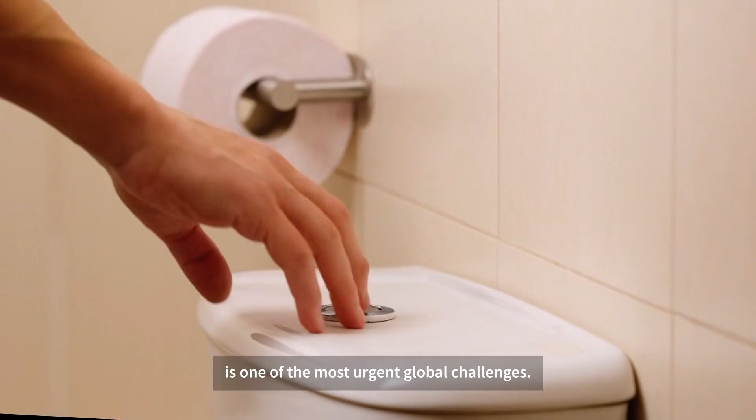Ensuring access to safe and sustainable sanitation is one of the most urgent global challenges. Despite notable progress, billions of people still lack adequate sanitation services. To tackle this issue, Sustainable Development Goal 6 was established. It aims to ensure the availability and sustainable management of water and sanitation for all by 2030.

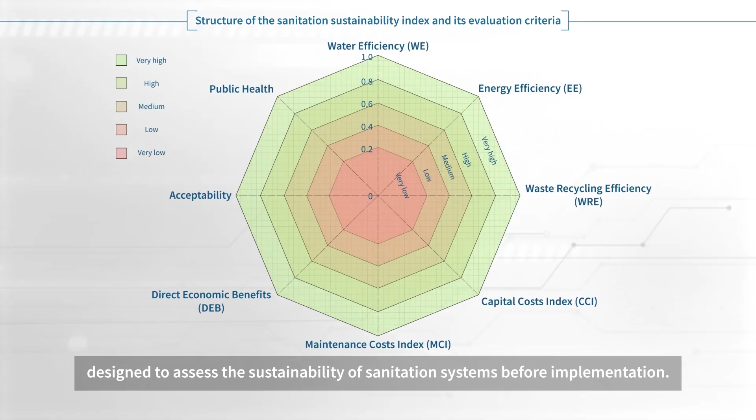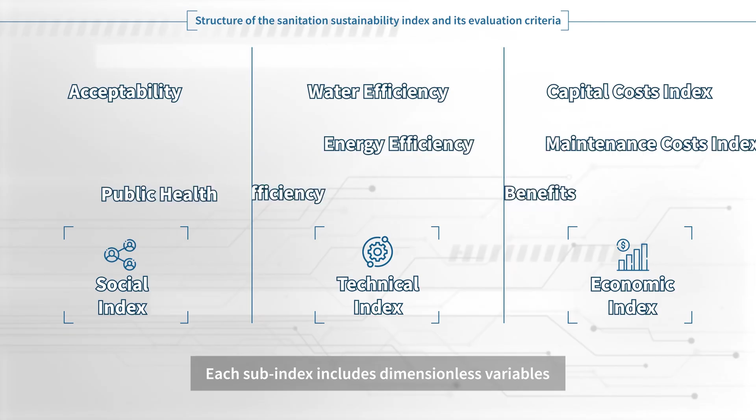To support this mission, a novel tool has been developed, Hashemi's Sanitation Sustainability Index. The HSSI is a community-based indicator designed to assess the sustainability of sanitation systems before implementation. It comprises 3 sub-indices: technical, economic, and social. Each sub-index includes dimensionless variables that are normalized to reflect the specific conditions of the community, ensuring that the index remains flexible, scalable, and context-sensitive.

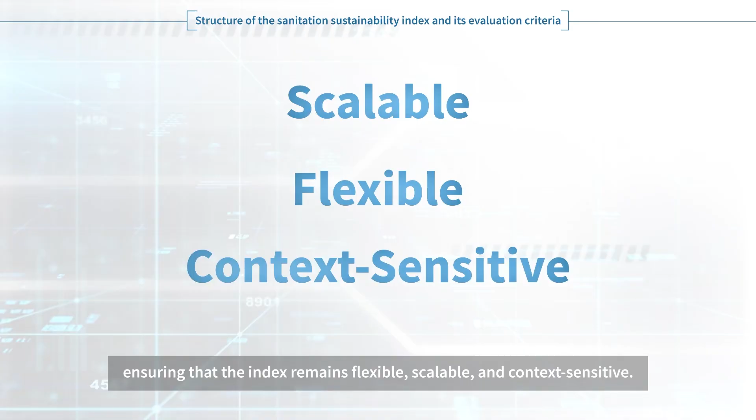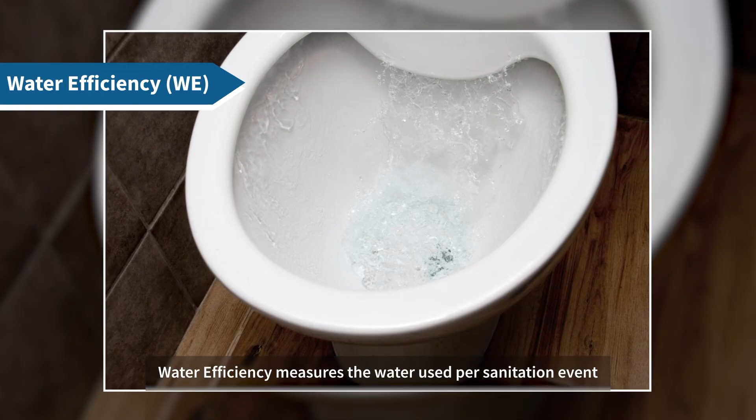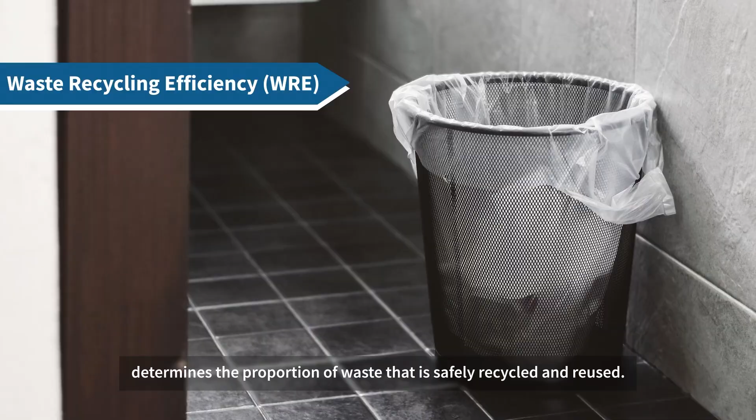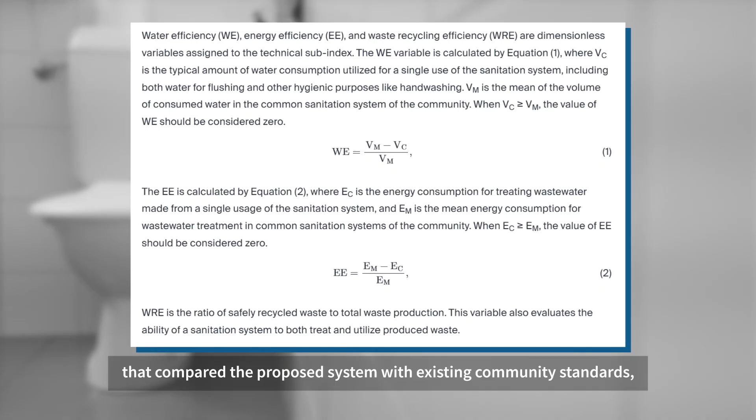The technical sub-index assesses 3 primary variables. Water efficiency measures the water used per sanitation event against the community norm. Energy efficiency evaluates the energy needed for wastewater treatment, and waste recycling efficiency determines the proportion of waste that is safely recycled and reused. These variables were calculated using straightforward equations that compared the proposed system with existing community standards, enabling meaningful comparisons between different technologies.

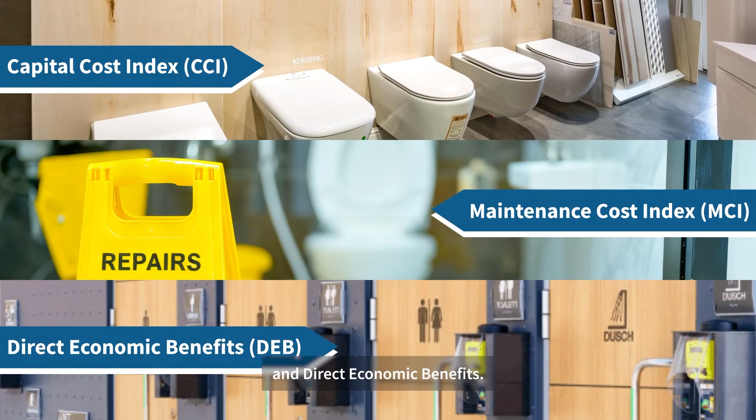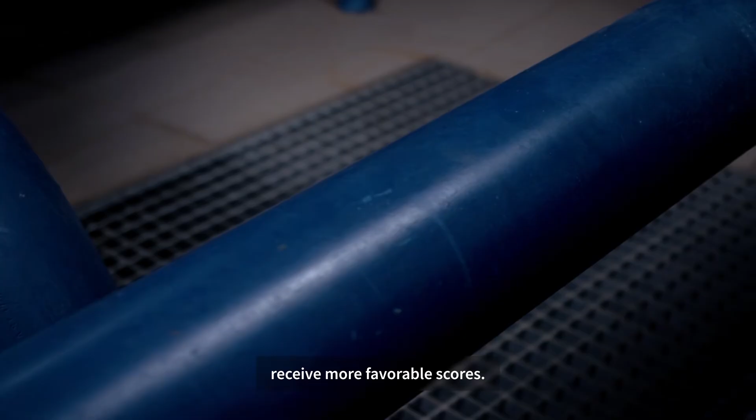The economic sub-index comprises the capital cost index, maintenance cost index, and direct economic benefits. These variables evaluate the financial feasibility of sanitation systems. Systems that are cost-effective or capable of generating economic value, such as fertilizer production, receive more favorable scores. This sub-index is particularly valuable for assessing sanitation systems in low-income or resource-constrained settings, where affordability is crucial.

The social sub-index examines acceptability, which considers how well a system aligns with cultural norms and user preferences. The public health impact assesses a system's effectiveness in promoting hygiene and reducing disease. These variables are evaluated through local surveys and pilot studies. Although qualitative, they are converted into dimensionless scores to ensure consistency and comparability.

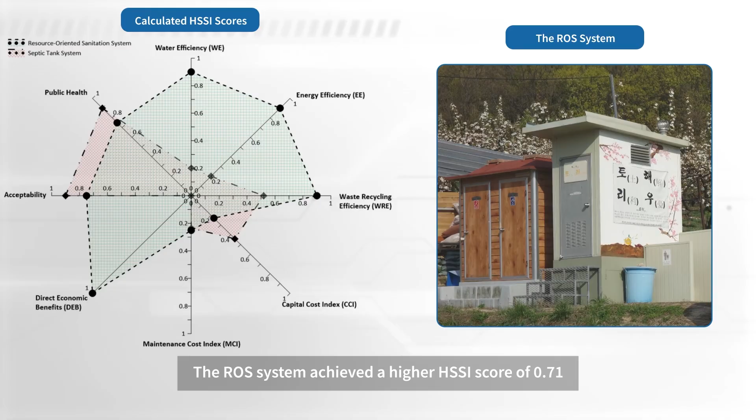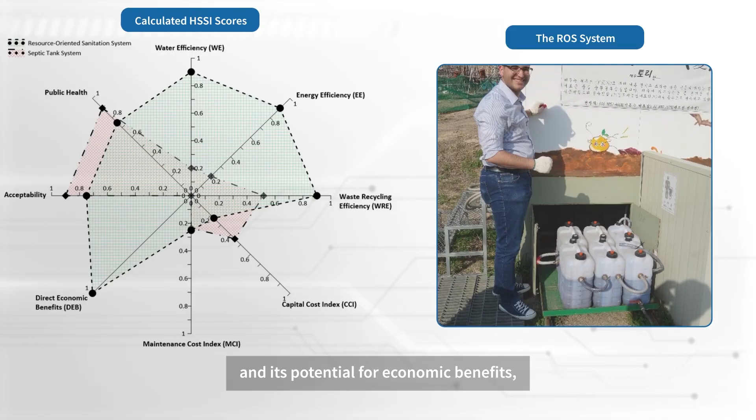To illustrate the HSSI's applicability, 2 sanitation systems, a conventional septic tank system and a resource-oriented sanitation system, were evaluated in a suburban area of Seoul, South Korea. The ROS system achieved a higher HSSI score of 0.71 compared to 0.36 for the septic tank. This was primarily due to its superior performance in waste recycling and its potential for economic benefits, despite being less socially acceptable.

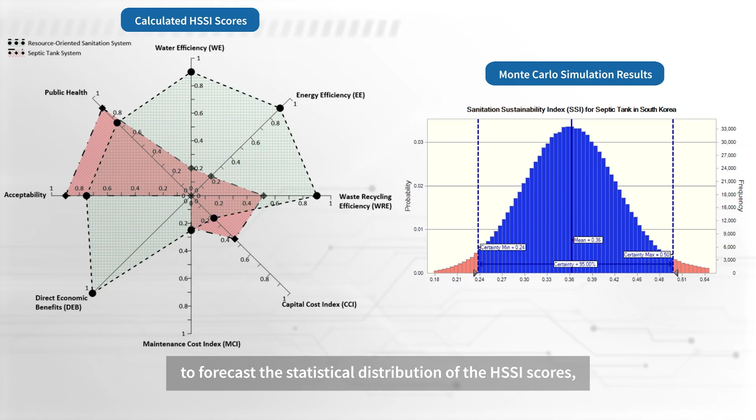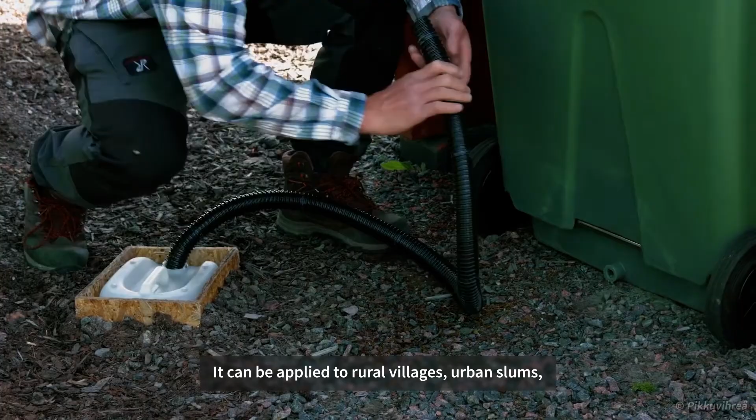Monte Carlo simulations were employed to forecast the statistical distribution of the HSSI scores, confirming the index's reliability. The calculated values fell within a 95% confidence interval. The HSSI is designed to be adaptable to various regions and timeframes. It can be applied to rural villages, urban slums, or even national level planning, provided that local data are available.

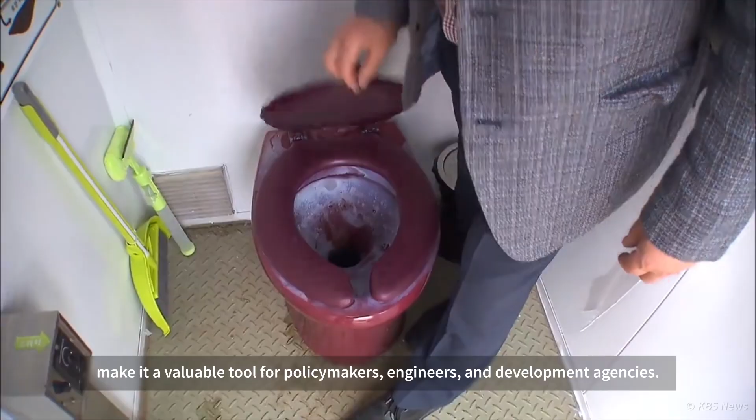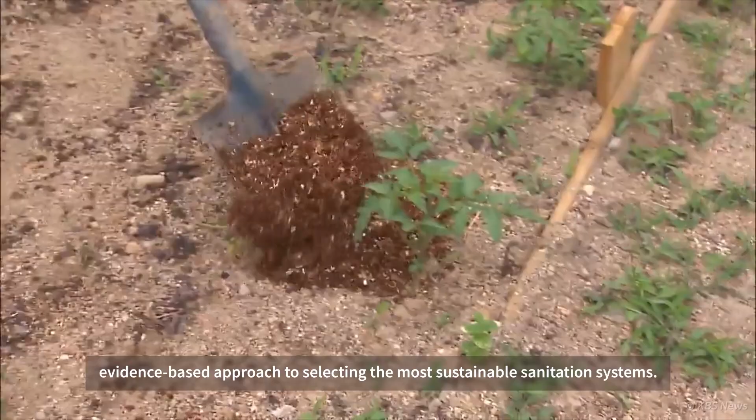Its simplicity, flexibility, and focus on pre-implementation evaluation make it a valuable tool for policymakers, engineers, and development agencies. Hashemi's Sanitation Sustainability Index offers a structured, evidence-based approach to selecting the most sustainable sanitation systems. By integrating technical, economic, and social dimensions, it supports informed decision-making and contributes to the global goal of universal sanitation access worldwide.